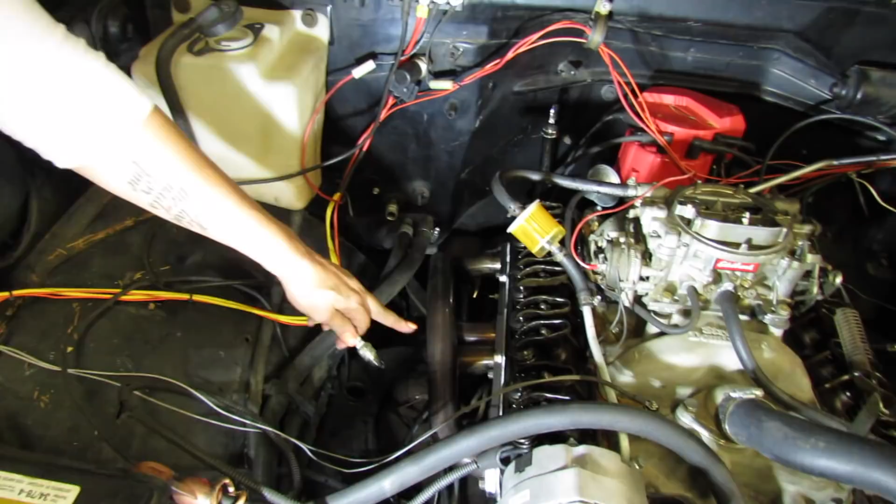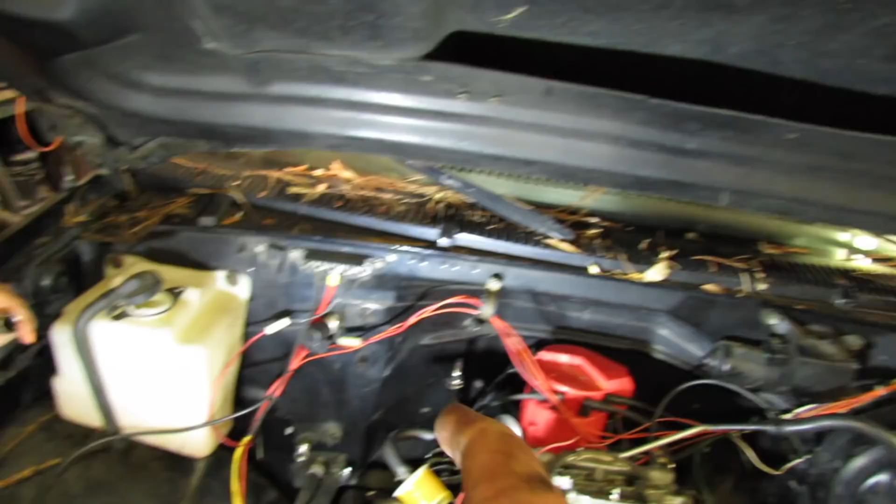1, 2, 3, 4, 5, 6, 7, 8. Who do you appreciate? Mrshevyshevy! Did you get it loose? No. Huh? No. What? No.

Let me know if you need some help. Get it? Yeah, oh you're so strong. You got them all out? Mm-hmm. What's this one look like?

So I think what we need to do next is run through the valve adjustment and see what's up. You have a tool that measures how tight those rocker arms should be, or how does that work?

Well, what you do is you put it on number 1 top dead center compression. You know how to do that? I think I did that one time with you, but it was so many years ago I can't really remember. It was when we were dating. We're coming up on 20 years of marriage, 25 years together.

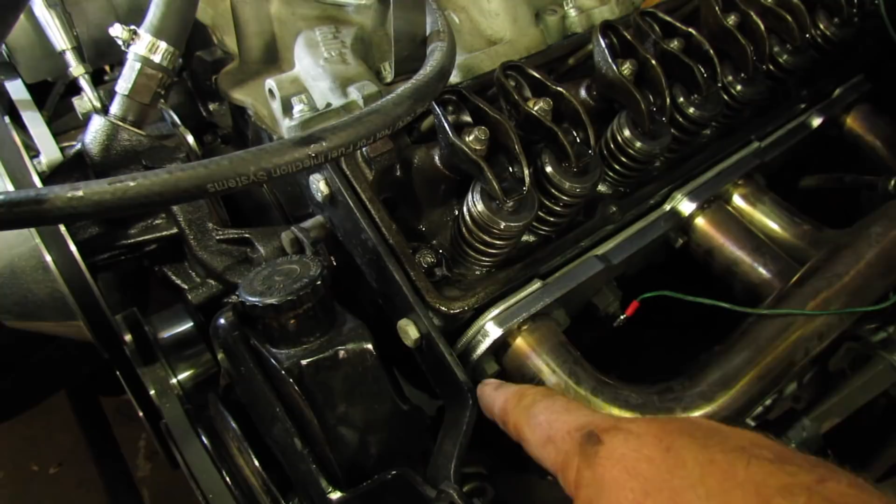What you need is this number 1 cylinder, the piston all the way up, these 2 valves closed with slack on the rocker arms. That's number 1 top dead center compression. When the valves are closed, it's making compression. Right? Right.

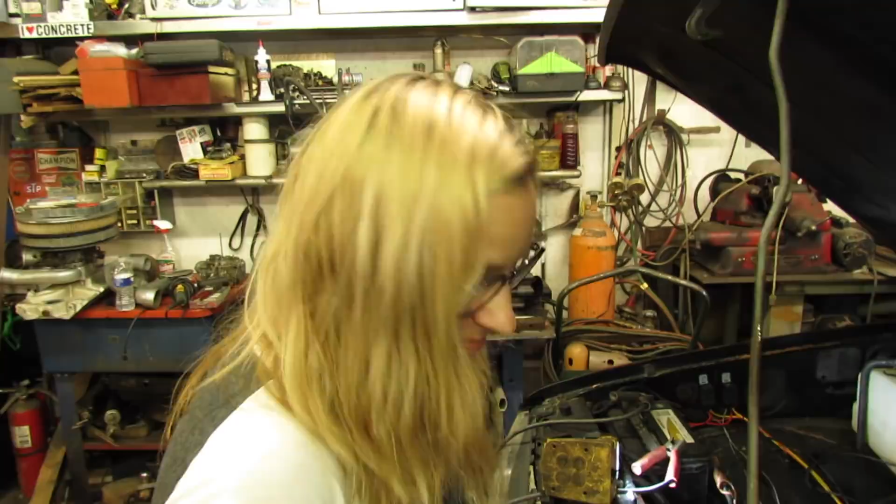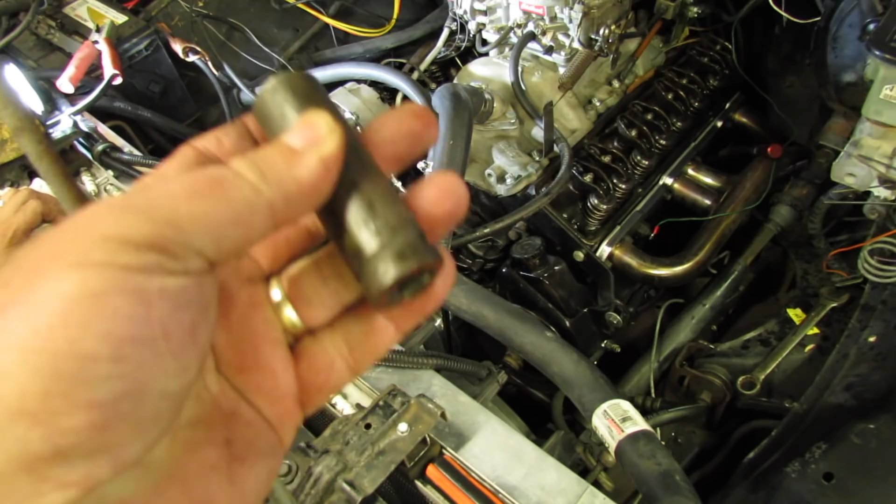Now I hate to say it, but I think the next problem we're going to have is when I go to put this 5/8 socket on the crank bolt, I'm going to find out that it is stripped. Because it's got these fancy smancy aluminum pulleys on it, and probably the bolt is too short, and it stripped out the end of the crank.

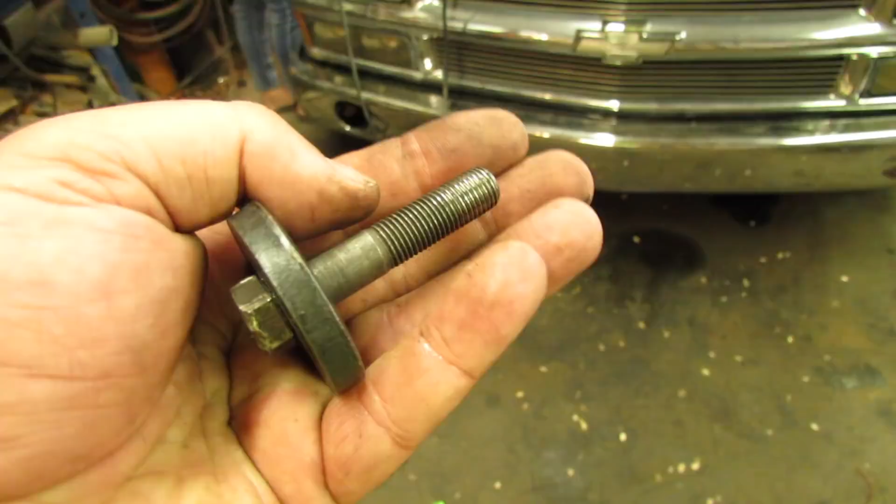But let's see if that's actually the case. Alright, I gave it just a little tweak with a little 3/8 drive ratchet, and it came out in about 2 turns. That leads me to believe that it wasn't in the crank as deep as it needed to be.

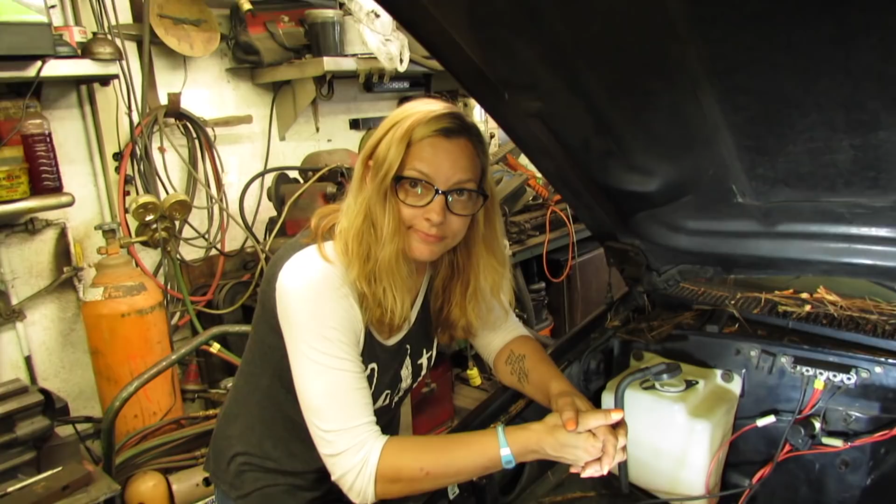So how deep does it need to be? Well, you need to have at least as many threads as the diameter of the bolt, and I think that's a 7/16 diameter bolt, which means it needs to have about 4 threads or so. And if I turned it out a couple turns, that means it only has a couple threads.

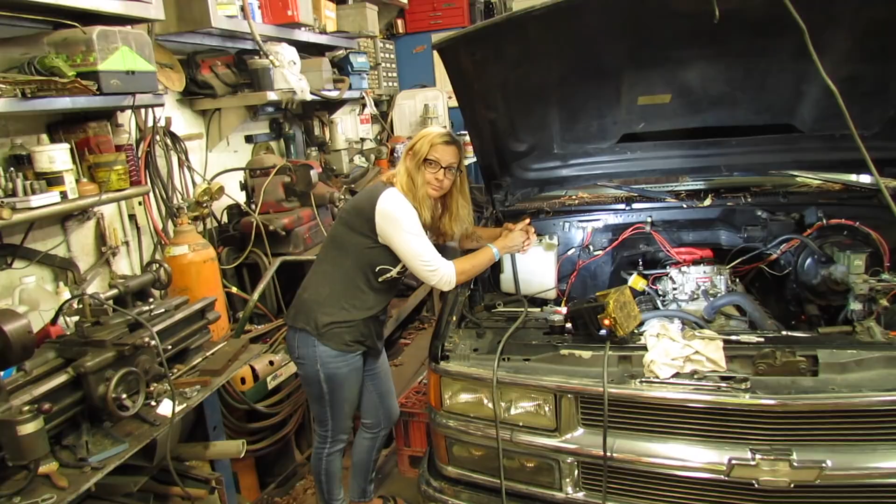What? Does that mean that the bolt is too short? In this application, yes. Or the pulley is too thick. And they changed out the pulleys. Yeah, they probably wanted a fancy aluminum pulley so it looked good at the good guy's car show. But looking good and running good are 2 different things.

That's right. Sometimes looking good and running good are 2 different things. In the words of the famous, world-renowned Mrshevyshevy.

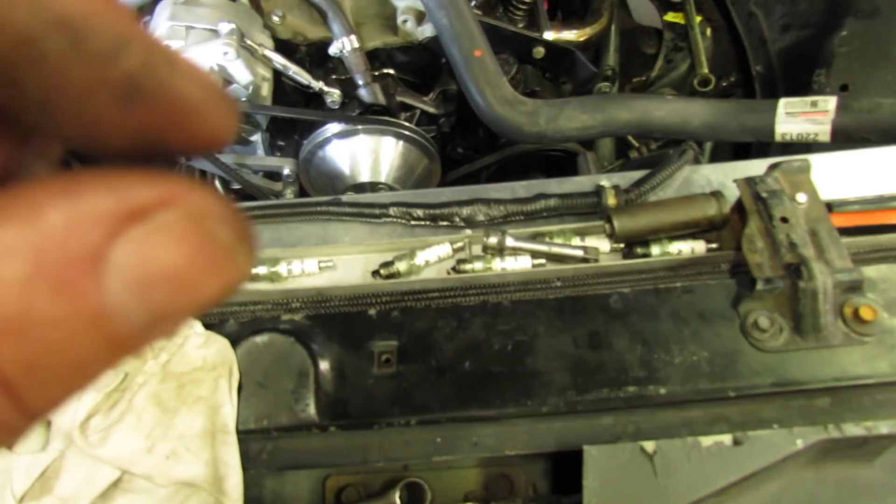Alright, what I did was I put a thinner washer on the crankshaft bolt. Hopefully it felt good tightening up, so let me see what happens.

And it was at Mrshevyshevy's suggestion. Alright, here's what we're fixing to do on Mrshevyshevy's recommendation. She advised that I go over on the shelf and get out the old motor's manual. And look up valve adjust hydraulic lifters.

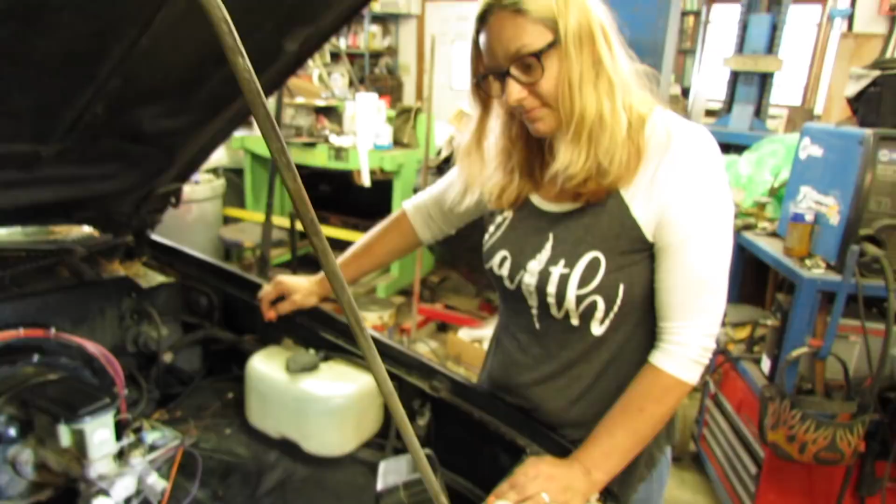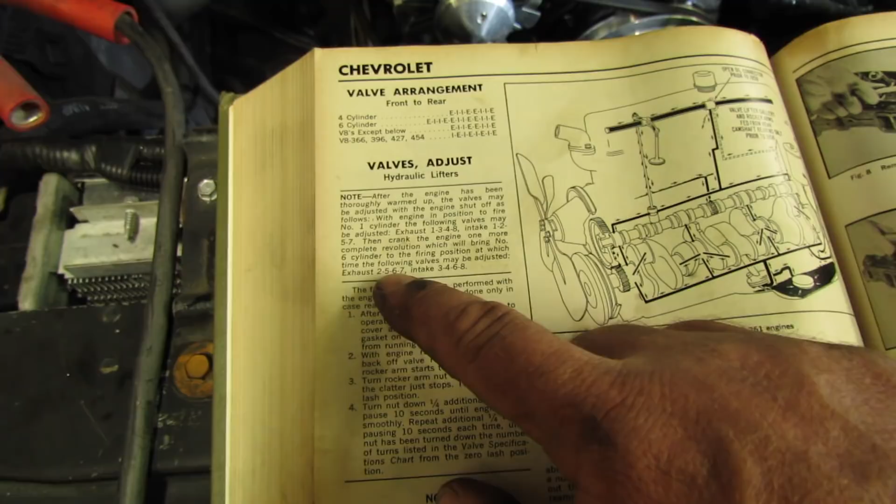Right here. And if you read through that, you'll see it says put the engine on number 1, top dead center, compression, and then adjust valves 1, 3, 4, and 8 on the exhaust side, and then intakes 1, 2, 5, and 7. Then turn the engine 360 degrees, which would put the number 1 cylinder back on top, but both valves would not be closed.

Right? I'm just trying to remember what you told me. Okay? And then what you'll do is adjust exhaust 2, 5, 6, and 7, and the intakes 3, 4, 6, and 8. Right? Right. Do I got it right? If that's what the book says.

You're not playing along very good here. That's right, that's exactly what needs to be done. That's exactly what you told me, right? Yeah, that's exactly what I told you. Alright, and I'm a man who does what his wife says. Right?

Right. Okay, and she said, get this piece of junk running, 'cause I'm tired of seeing it languish around the yard, making it hard to weed. I'm not very attached to this truck. I'm not attached to this truck. But somebody could be, yes. This is a nice truck. It is a nice truck. I'm just... it's got power windows.

Old school 350. Turbo 350. Too bad it don't go in reverse. But we can fix that. It'll be a good truck for somebody, just not us.

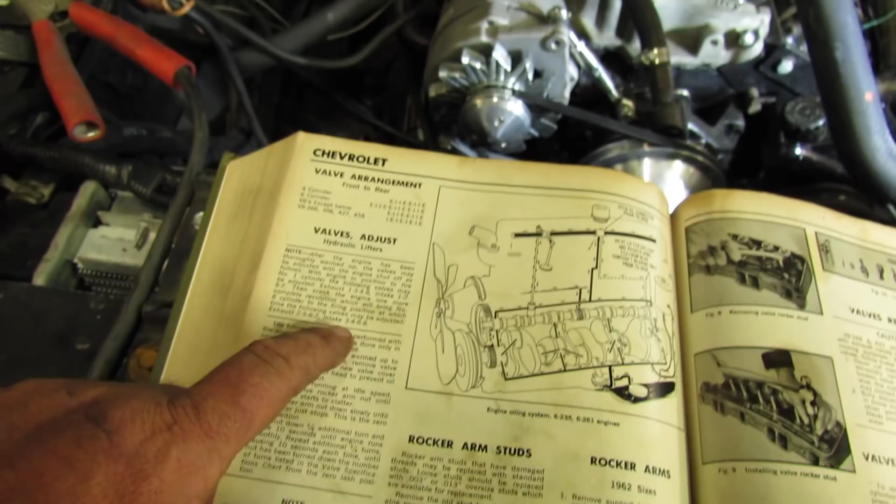That's right. Alright, I almost screwed up a couple times, but Mrshevyshevy got me straightened out. Now we're going to turn the motor over 360 and get the rest of them, which are exhaust 2, 5, 6, and 7, and intake 3, 4, 6, and 8. Right? Right. Mrshevyshevy had to take over.

I couldn't get that last spark plug, so she's going to get it for me. Right? Right. Say what? They're all tight. So we need to put the plug wires on, put the valve covers back on, crank it up and see if it runs like a dream. Yeah, okay, there's the rocks.

Mrshevyshevy just told me that I gave her too short of bolts for the valve covers.

Hope you get that done pretty soon. I'm starting to get tired. I want to go in the house and relax.

What? While you're sitting on the chair looking at your phone. I think I could pull off this wife stuff. Cook, look at my phone. We're past the diaper stage. I think I could do it.

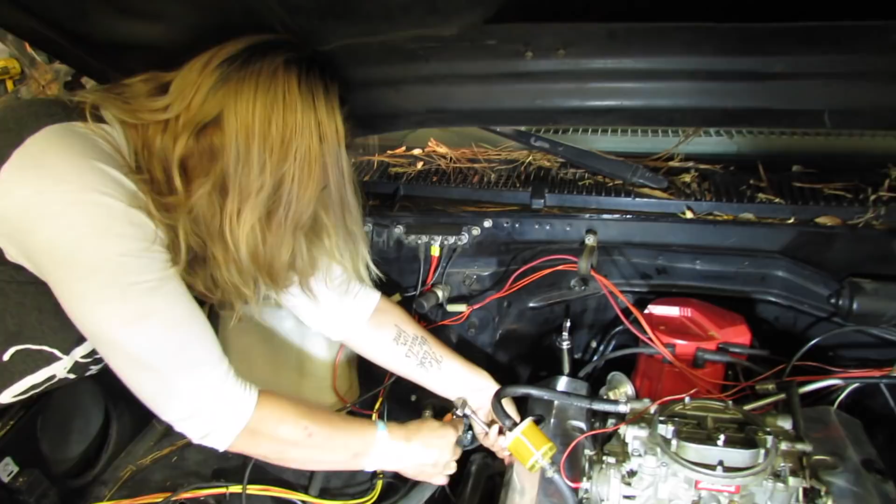Sleep in, whatever, go grocery shopping, cut the grass. Every couple of weeks or so. Hey, I would do it every week if the lawnmower would run. It'd be up to you to fix. I was the wife. Do what?

Was that fast enough for you, Mr. Hevyshevy? I guess. Now it's time to fire it up and see how it acts. I don't have very high hopes, but let's just see how it acts.

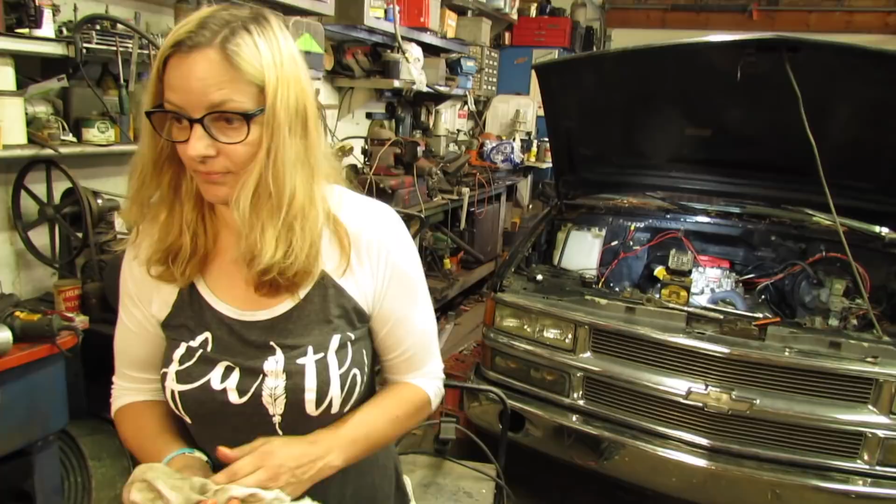I'm gonna open the door. You want to run the camera? Sure. Look at this, the battery's dead. These new batteries I bought on eBay are junk. Because they weren't new, they were used. No, they were new. Really? Yeah, made in China. Well, there you have it. You got it on? Yes. Let's see what it'll do.

A little bit better, kind of smoky. Why is it so smoky? Not sure. You didn't let the valve cover gasket slip when you were putting it on, did you? I don't think so.

I'm encouraged, it sounds better. Except for that exhaust leak.

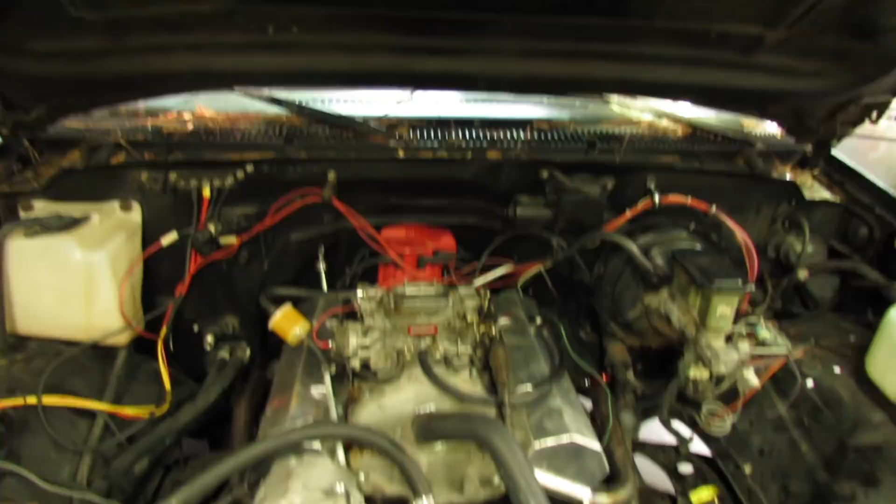Alright, let me play with it some more. What'd you let it quit for, girl? Well, I guess I didn't know where to push it on. I was trying to hit this, on the throttle linkage, right here. You ramrodded the whole show here and don't know how to rev the motor?

Oh, what the heck? Ready? Yeah. Probably, go ahead, I'll handle it. Whoa, easy, easy, easy. Just crank it up.

Okay. Well, other than the big puddle of oil that is accumulating under it, it sounds a little more promising. Except it ain't got no reverse. Well, I'm a little encouraged. I was ready to throw in the towel yesterday.

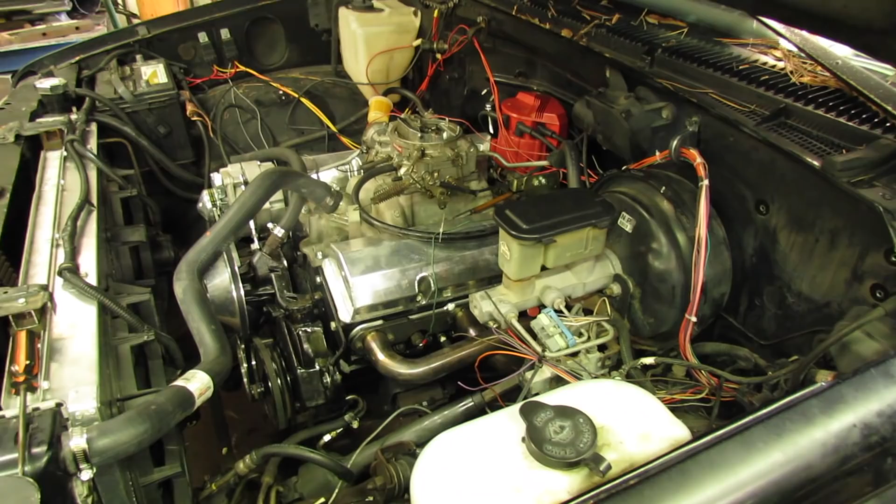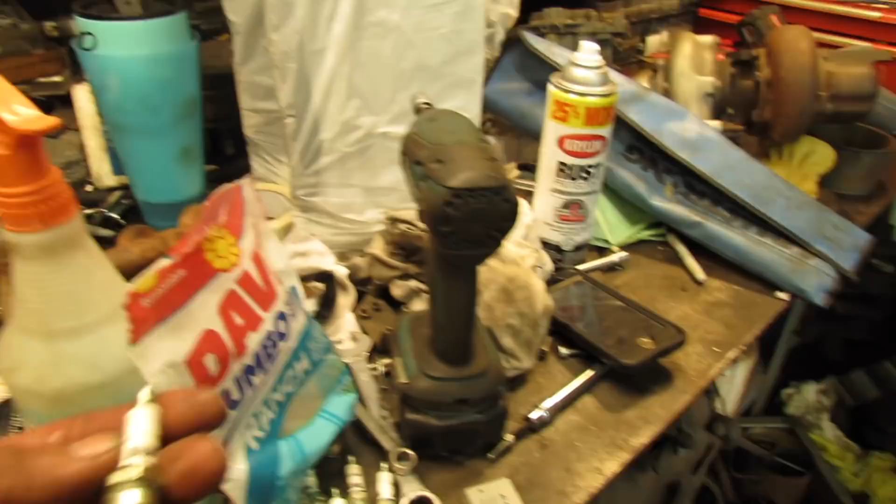But I adjusted the valves and put in some new used spark plugs from a $75 350 that I bought yesterday. That was in a box, used, and they're Autolites, which I usually steer away from on GMs, but it runs much better. What it had in it was these super spiffy XL shorty header plugs.

I ain't never had no luck with those. I'm not sure why, I'm not an expert, but I have used them a few times. Every time I did, didn't have no luck. So take that for what it's worth.

She still don't have no reverse. And unless that comes around here pretty quick, I think I'm going to have to take the transmission out. But I may not have to pull the motor.

I think I'm going to have to drop the oil pan and reseal the thing where it hits the oil at the timing cover. That's a common mistake - people use the thin one when they should use the thick one, and so on, rubber seal I'm talking about. Or they just get in there cockeyed, or they cut the tab off the back of the timing cover, or who knows what, but I gotta figure that out. We can't have it leaking a foot diameter circle every time it runs.

Alright, let's see how quick it cranks up. It's sat there a minute. I added some more power steering fluid so it quit growling. I ain't found the tach wire yet.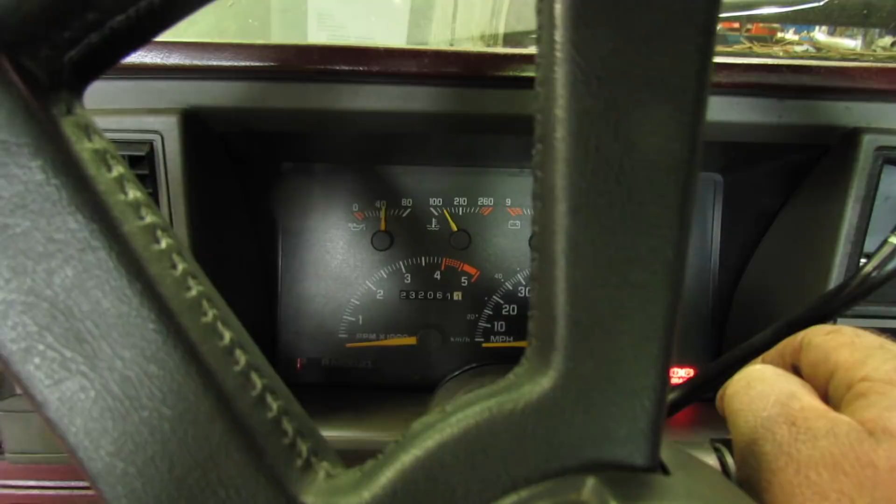Maybe that carb's too big. Nobody home in reverse. Better not run her too much longer, huh?

Good grief. This has got me a little nervous. Listen to this noise. Sounds like something loose. Got good oil pressure. Let's pull it in.

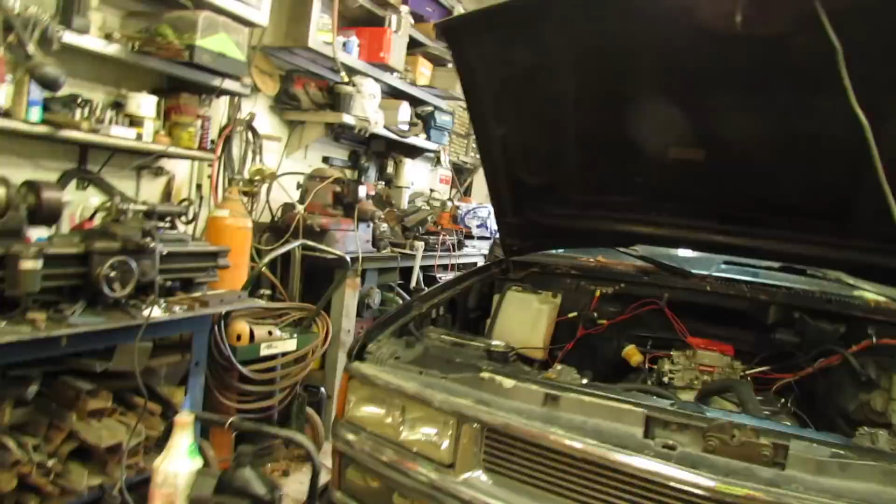Wasn't running too good either. What's this? Huh, look at that, oil everywhere. Probably better not rev it up too much till I see how much oil's left in it.

Alright, that's it for today.